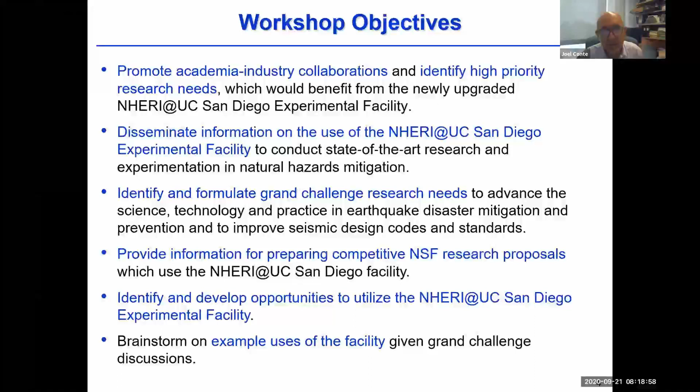So a few words about the agenda. After this introduction, I will present the capabilities of the NHERI at UC San Diego Experimental Facility. Then we will have two of my colleagues, Professor Jose Restrepo and Tara Hutchinson, talk about highlights of recent projects conducted on the LHPOST.

Then we will have a number of keynote presentations, five of them, four today and one tomorrow. We have Professor John van de Lindt who will talk about building structures, Dr. Sissy Nikolaou about geostructures, Dr. Anthony Sanchez about bridge structures, and Dr. Craig Davis about lifelines and utilities. I will provide a few concluding remarks.

On both days, we have reserved some time in the afternoon from 2 to 4. You can get more information about this on the agenda. We have reserved some time to answer questions and provide advising on future projects. We call this office hours.

Tomorrow we will start with a virtual walkthrough of the construction side of the LHPOST 6. We are going to call our facility LHPOST 6 once it is up and running with 6 degrees of freedom. Since we have the workshop virtually rather than in person, where we'd have a nice tour of the facility and you could see the real thing, we tried to create a virtual one.

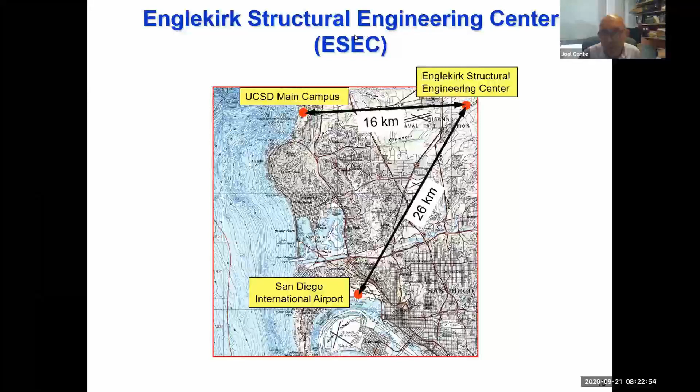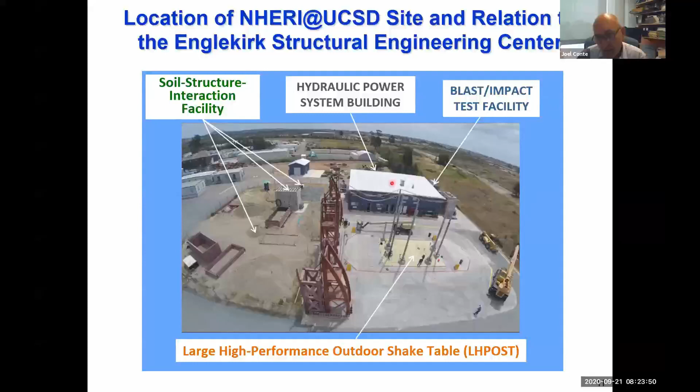We also have a soil foundation structure interaction facility there with 2 refillable large soil pits on each side of a large reaction wall. We have the hydraulic power system building that contains all the hydraulic power supply for the facility. We also have a unique blast impact facility that makes use of Servo-Hydraulic systems and uses the same hydraulic power supply as the shake table.

The site is accredited through the International Accreditation Service, which means that in over 80 countries in the world, the tests produced at this facility are accepted with no questions asked.

We were first part of the NEES network, funded by the National Science Foundation. NEES stands for Network for Earthquake Engineering Simulation, from 2004 to 2014, for 10 years. Then we became part of NHERI, which stands for Natural Hazard Engineering Research Infrastructure program, also funded by NSF. That ran initially from 2016 to 2020, but NSF is in the process of renewing NHERI up to 2025.

Here we have the UC San Diego team, with pictures of everyone. I'm the PI. There are 4 co-PIs: Tara Hutchinson, Gilberto Mosqueda, Benson Shing, and Lelli van den Einde, each responsible for different aspects of the site. Professor Jose Restrepo and Enrique Luco are senior personnel - they were the first and second PI of the site, and I'm the third one.

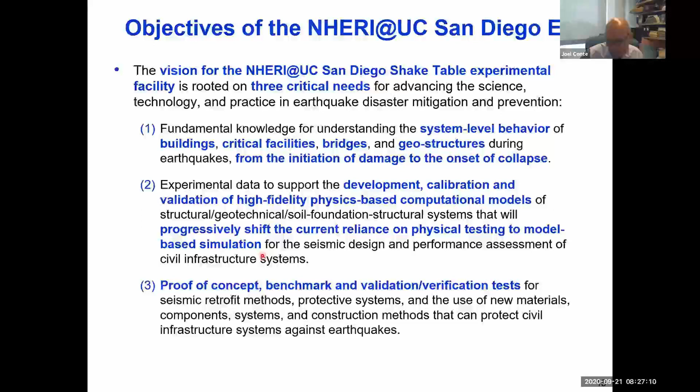When we designed the facility in 2001 to 2002, the key objective was to develop a shake table able to reproduce accurately large earthquake ground motions, especially those produced by near-source ground motions. Since we have a mild climate, we could build it outside. So we have no height limitation, which allows us to test specimens that could not have been tested in the largest shaking table in the world, at the E-Defense facility for example. Many of our specimens could not have been tested there.

So the facility was built in 2002 to 2004, commissioned on October 1st, 2004, as part of the NSF NEES network. Since then, we have conducted about 34 major research and a few commercial projects in 15 years of operations, since we closed on October 1st, 2019 for the upgrade.

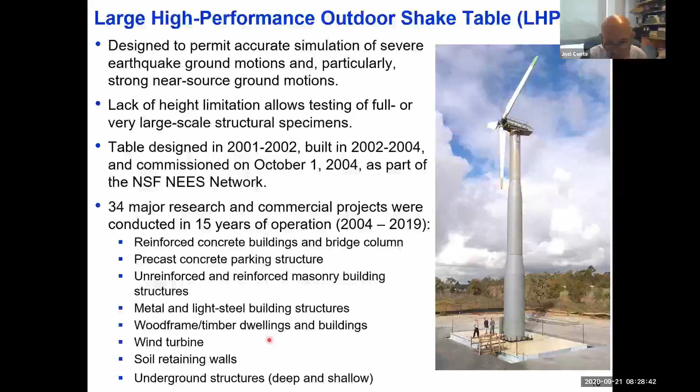Many of the specimens tested consist of buildings made out of reinforced concrete, precast concrete, reinforced and unreinforced masonry, metal, light steel, wood, timber, but we also have other types of structures like the wind turbine you see here, and geostructures such as soil retaining walls, underground structures, tunnels, and so on.

If we had soft soil, for example, at the site, it would have to be probably 15 to 20 times as big as what it is here. We took advantage of the soil stiffness and the radiation damping to have a light reaction mass, which helped us to lower the cost. This facility was designed as a 6 degree of freedom shake table system, but built only as a 1 degree of freedom to accommodate the budget at the time.

The salient characteristics of the table are the stroke, plus or minus 75 centimeters. A very important parameter, the peak velocity, 1.8 meters per second, which requires an incredible flow of oil to feed the actuators, as we will discuss more later.

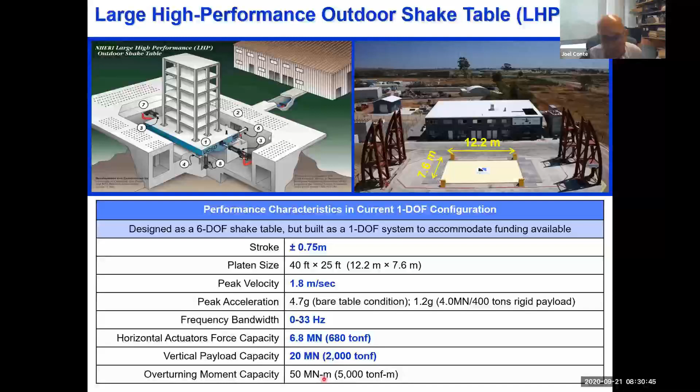You can see the peak acceleration for the bare table approaching 5G, 1.2G when we have a 400-ton rigid payload. The frequency bandwidth is 0 to 33 hertz. The maximum horizontal force, a number we will compare with the upgraded version, is 6.8 meganewton or 680 metric tons. And the vertical payload capacity, 20 meganewton, with a very large overturning moment capacity of 50 meganewton meters.

To summarize, our shake table provides the ability to simulate near source earthquake ground motion, which involves large acceleration, velocity, and displacement pulses, allowing testing of densely instrumented, large or full-scale structural specimens. Also, when we use the shake table in combination with our two large soil boxes that we'll talk about, we can also test geostructures at large scale.

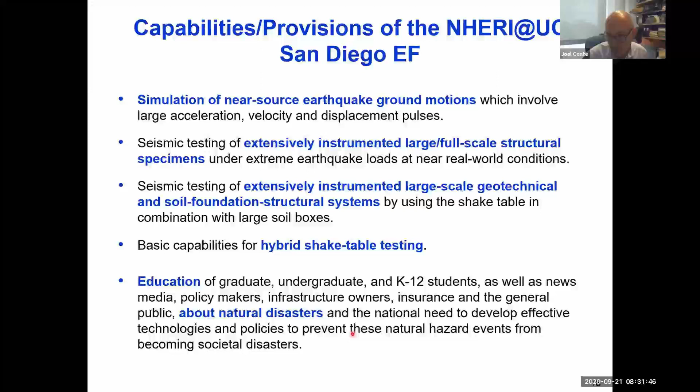We also have some basic capabilities for hybrid shake table testing. And in terms of education, this is an amazing tool from kindergarten to graduate school, and also for news media, policymakers, infrastructure owners, insurance, and the general public, about natural disasters and the need to develop technologies to prevent these disasters from becoming societal disasters.

So now let's go and look at the components of the shake table. First, the LHPOST, 1 degree of freedom, and then I'll explain to you the changes we are making on the table to convert it to 6 degree of freedom.

So here you have the reaction mass. Initially, we had 6 pressure balance bearings that in 2009 were already replaced by 6 vertical actuators, but ported with a very small servo valve, so they could not be used dynamically until we reopen next year.

You see here one of the longitudinal actuators. You see 2 hold-down struts. They are nitrogen-filled tubes that apply a downward force to pre-stress the platen against the vertical actuators, giving the overturning moment capacity.

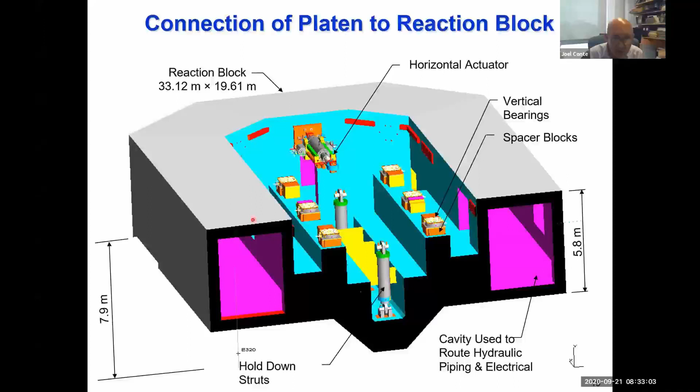Appreciate the size. You see the length of the reaction mass, 33 meters, width almost 20 meters, the largest depth 8 meters.

So here you see the platen, the longitudinal actuators, and the 2 hold-down struts. As part of the upgrade, we are going to need a 3rd hold-down strut. You see we already have the plates here, with the spacer blocks ready to receive it.

We see a view from underneath. So when we move the platen, it moves on top of the vertical actuators through these wear plates, represented in pink here. As part of the upgrade, we have to replace these wear plates with much larger ones, since now the table can also go in the transverse direction.

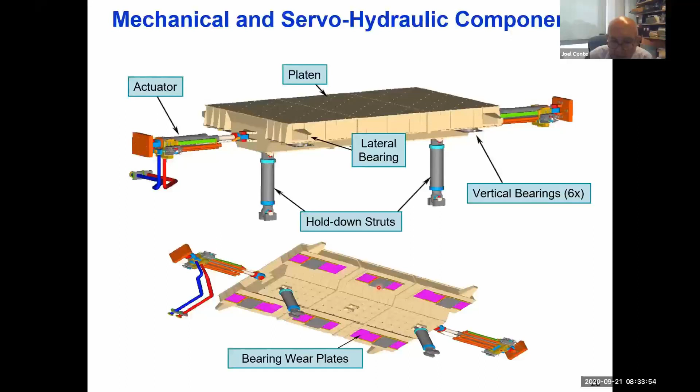And these gray plates that you can see here are the pressure balance bearings that are on top of the vertical actuators.

You see here a picture of the hold-down strut. They applied a very large downward force, you can see 200 metric tons. The weight of the platen for the 1 degree of freedom was 145 metric tons. So we have 2 gigantic forces of 200 metric tons each, one at each end of the platen, for the overturning moment capacity.

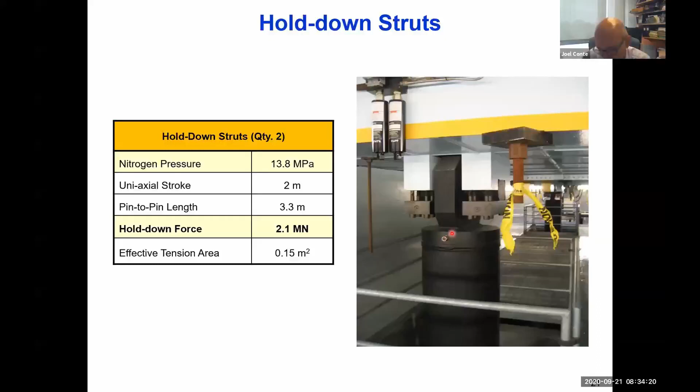You see here the horizontal actuators. We had 2 for the 1 degree of freedom. They can push more than they can pull, but since we have 2, if you add these numbers together, you have 6.9 meganewton of push and pull on the platen.

Each of these longitudinal actuators is equipped with 2 very large servo valves, with a very high flow of 2,500 gallons per minute each. That's what is needed to reproduce the peak ground motion velocity of 1.8 meters per second.

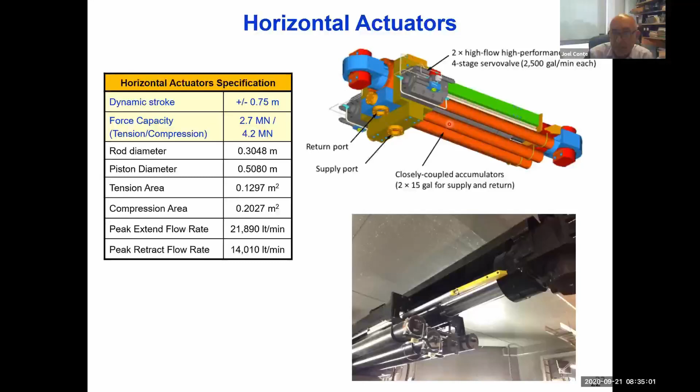So this is one of these servo valves, gigantic. It's a 4-stage servo valve. Those of you who are interested in servo-hydraulics can see here the 4 stages. The spool that we can see here inside the sleeve for the 4th stage is gigantic.

It weighs 320 kilograms, and you see that's where we receive the high pressure fluid at 3000 PSI. It arrives in this cavity here, and when the spool moves to the left or to the right, you can see these port windows. Then they would port the fluid either to the left or the right of the piston in the rod, and then the rod would either extend or retract and push and pull the table.

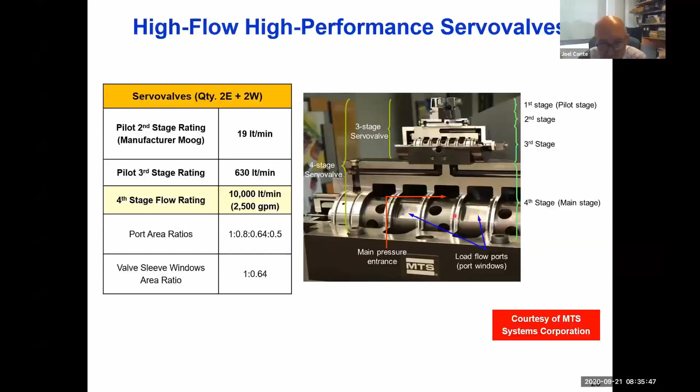So this is a picture of the vertical actuators that we already acquired in 2009. They have a capability of moving plus or minus 5 inches, but we never used this capability until now because they were ported with a servo valve of 15 GPM. So we had no dynamic capability, but now we are going to port them with a servo valve of 5,000 GPM. Huge servo valve.

You can see here the pressure balance bearings, that gray plate that is interfacing, connecting to the wear plate at the bottom of the Platen. And you see the oil coming in these channels here, radial and circular. There is a seal on the outer circle to contain the lubrication and the oil.

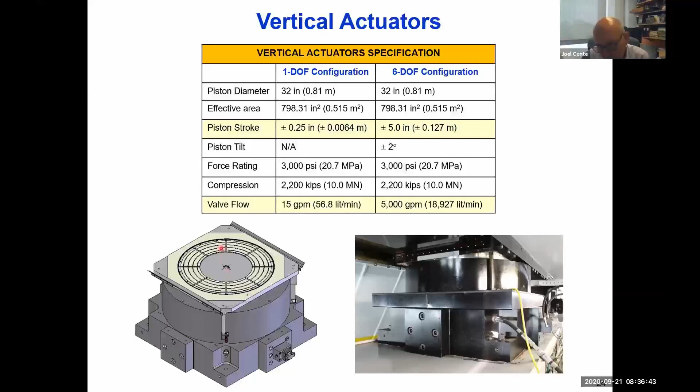Here, just to show you how the hydraulic power system works when we want to reproduce an earthquake. We cannot rely on direct pumping from pumps only, it would take many, many pumps. We have only 2 of them, 2 very large ones. You see the flow of the pumps here.

And then we have a hydraulic accumulator bank, 50 bottles of 50 gallons each, to 2,500 gallons total. They are filled with nitrogen. There is a piston at the bottom, and we can bring some oil at the bottom of each bottle. We can occupy up to 20–25% of oil. So we bring oil until the nitrogen pressure reaches 5,000 PSI. In idle situation, the nitrogen pressure is 3,000 PSI when the piston is at the bottom.

So we pressurize oil in the accumulator bank, and when we want to reproduce an earthquake, we release this oil, we blow it down through a blow down valve. We have 2 now, but in the new system we'll talk about, we're going to need 6 of them. The oil goes through large pipes to the actuators, and then returns to a surge tank, a very large surge tank, which was designed to be large enough for the upgrade to 6 degrees of freedom.

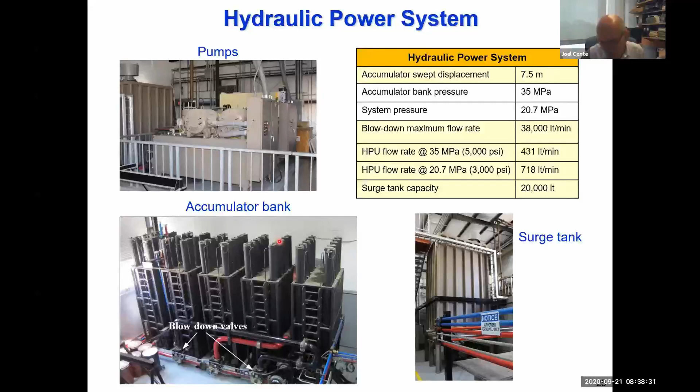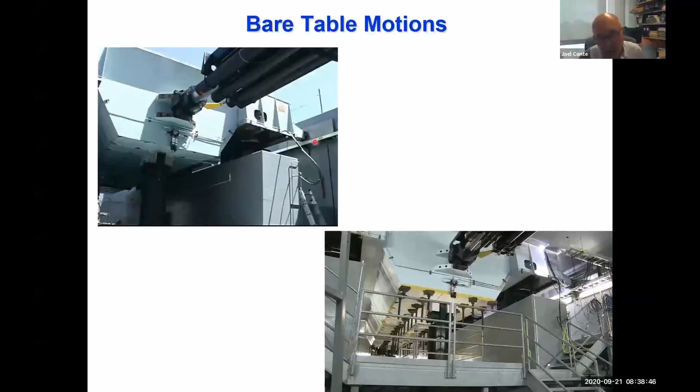So here, this was during commissioning a long time ago in 2004. You can see how it works. You could see a view from underneath here with the nitrogen-filled cylinders.

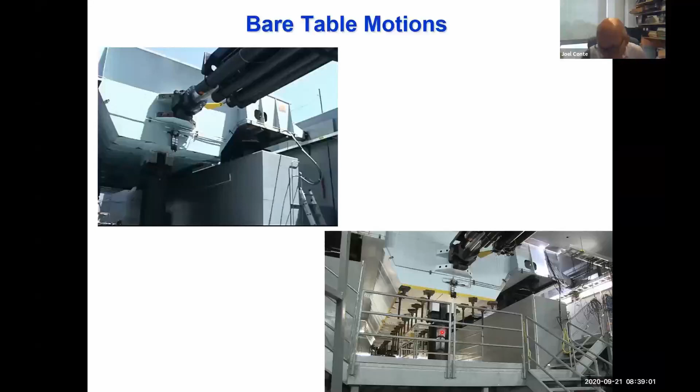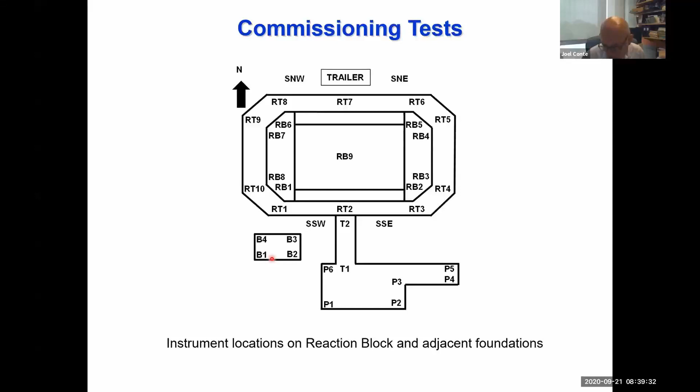You see here a few words about the reaction mass. This is just after its completion in 2003. We did some forced vibration testing by using large eccentric shakers. You see one of them there, because we wanted to understand the dynamic characteristic of the reaction mass embedded in the soil at the site. So we had instrumented the reaction block and the foundation of the building and the foundation of the blast facility.

This slide is important because it shows you the frequency response function of the reaction mass of the block. When both shakers at both ends were in phase and applying force in the east-west direction, shown by my cursor here, the horizontal displacement at the top of the reaction mass, the blue curve here, as a function of frequency, with the forcing function applied, scaled to the maximum force that the actuator can produce. Of course, the shakers could not produce this force.

Later on, when we had the actuators, we did a test of linearity, and everything behaves quasi-linearly. In other words, we could scale the frequency response function from our test with the shakers, scale them up, and get the same frequency response curves as we got when we were using directly the actuators acting on the reaction mass.

So you can see here that we have a characteristic frequency, a natural frequency so to speak, of the mass in the soil at about 10 to 11 hertz, but it's a broad peak. There is a very high radiation damping, about 30 to 40%. And look at the deformation, a quarter of a millimeter, very, very small.

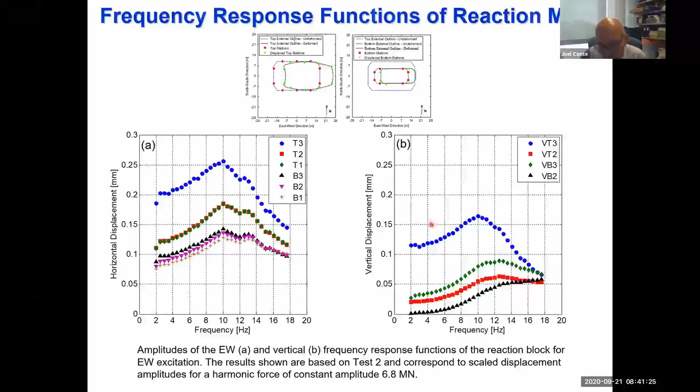This is the same thing, but for the vertical displacement at the end of the reaction mass, since we have rocking. When we excite this horizontally in the east-west direction, we have translation and rocking, so the vertical displacement is 0.15 millimeters. We also did some tests in the north-south direction, and this is published for those of you who are interested.

Let's say now a few words about the MTS Three-Variable Controller, the 469D, that was used on the LHPOST 1 degree of freedom and will also be used in the upgraded table. This controller is used in all large shake tables manufactured by MTS. I should have mentioned early on that the design of this facility is a joint effort between a team of professors here at UC San Diego and MTS Systems Corporation for the initial design and now also for the upgrade.

This controller is a linear state variable controller, the three-state variable controlled by this TVC, which stands for three variable controller: displacement, velocity, and acceleration. We can choose the mode, which basically tells you which signal you are going to provide to the controller as a user. Most of the time we provide an acceleration signal, the earthquake accelerogram that we want to reproduce.

This controller has special features to compensate for the various sources of signal distortion due to linear dynamics or nonlinear dynamics. The options are different if you want to reproduce harmonic motions or broadband signals like earthquake records. The ones we use the most when reproducing earthquake records are the adaptive inverse control, AIC, and the online iteration, OLI, which is an iterative signal matching technique.

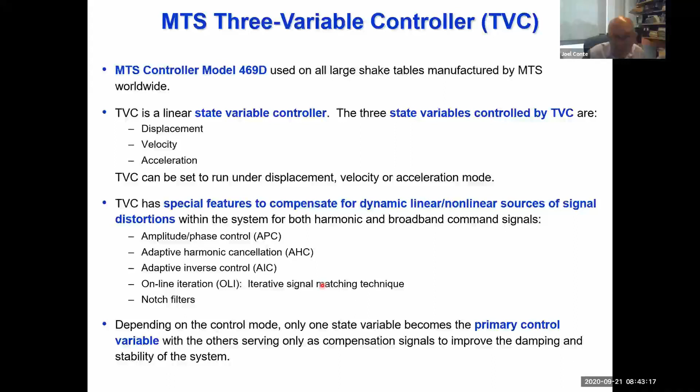So on this slide, there's a lot of technical information, but I think some of you are interested in this. You see a block diagram of the TVC part of the controller, the basic TVC for the 1 degree of freedom LHPOST. You see a reference generator where you bring your signal, typically acceleration, and then the reference generator will integrate to get velocity and displacement, and differentiate again to get the jerk, the third derivative of the displacement.

All these signals are used in a feed-forward way in the control loop. There is a feed-forward gain, a control feed-forward gain here. It gives a lot of flexibility to shape the transfer function of the shake table system.

In terms of feedback signals, we measure the acceleration feedback and the displacement feedback through the LVDT associated with the longitudinal actuators, and internally the controller computes the velocity. But all three signals are not just measured - they are measured and then recomputed, considering that at low frequency the LVDT produces the most accurate signal for displacement, and at high frequency the accelerometers provide the most accurate measurement.

So they are hybrid signals that are reconstructed to get the best possible estimate of the true displacement, velocity, and acceleration. There is also the force feedback, the delta pressure feedback coming from both actuators. So the control loop is closed on the displacement - you see there is the target displacement here, and there is the feedback displacement.

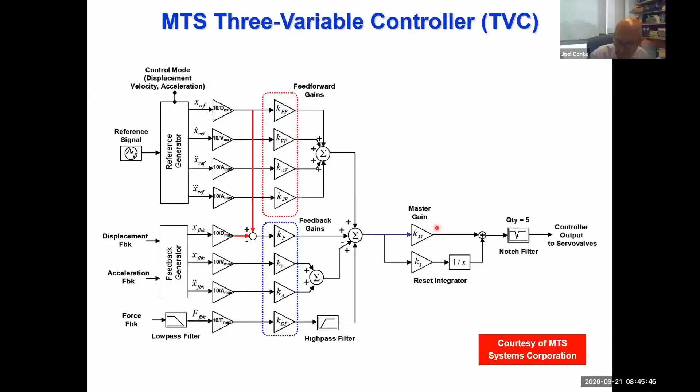So when we tune the controller for a shake table test, if you come and do some testing here, we will ask you to give us your earthquake records. For each of them, the shake table operator will spend some time tuning the table so that the ground motion record you give us will be best reproduced on the shake table system. So the tuning process consists of 3 steps.

The first step: the shake table operator iteratively keeps changing the control parameters, the feed forward gain and the feedback gain, until the shake table is able to reproduce a random type motion that we call white noise, at an amplitude of root mean square about 7% G.

So the shake table operator sees the signal on the screen, the time history, and keeps changing the gain until these time histories are reproduced pretty accurately, or until the transfer function you see here is as close to 1 as possible. Of course it can never be equal to 1 because it's a very complex dynamic system. You can see here an example - the black would be the transfer function at a certain stage of tuning.

Then in the second step, the inverse transfer function of the shake table system is estimated as accurately as possible using the AIC technique, adaptive inverse control.

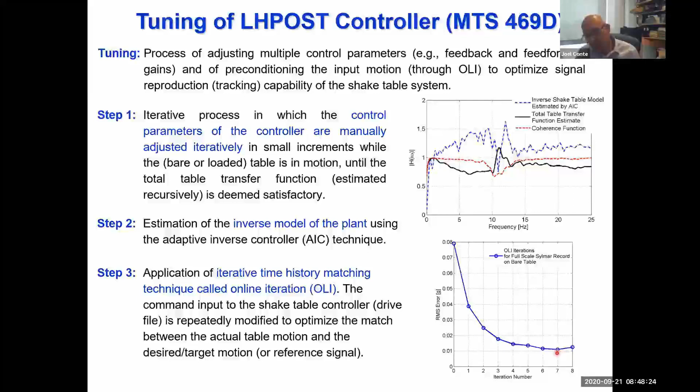That error goes down iteration by iteration until you reach a point where it cannot go down further and it starts to increase again. At this point we would save the drive file, and on the day of the test we use that drive file to reproduce the earthquake motion on the platen.

This is to show you the accuracy of the LHPOST 1 degree of freedom. You can see here we were trying to reproduce an earthquake record from the 1994 Northridge earthquake - the acceleration time history, the target in red and the one achieved by the table in blue. You see the zoom here - very accurate.

You see here also the achieved and target spectral displacement and pseudo acceleration spectrum. We are very proud of this - it's very, very difficult for such a large shake table facility to have such accuracy.

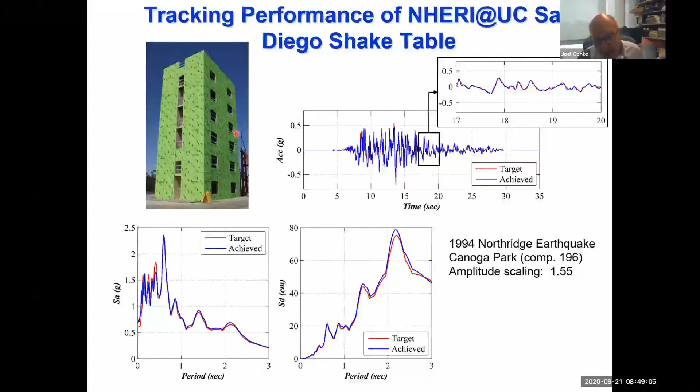In terms of instrumentation, whenever we test a specimen we have a large number of channels. We have 12 nodes at 64 channels each, 768 channels total. Some of them have to be used for the machine itself to understand the response of the platen and so on, but still overall a very large number of channels.

We will have a brand new data acquisition system. In the past we had 16-bit, but we were just awarded an MRI proposal from the National Science Foundation to update the data acquisition system. We will have 24-bit analog to digital resolution, perfectly simultaneous sampling and not multiplexing, and over 25,000 samples per second per channel available.

Typically we sample at 200 or 250 samples per second. We have an inventory of instruments: accelerometers, displacement transducers, string potentiometers, load jacks, load cells, soil pressure transducers. We have a GPS system that allows us to get displacement time history in 3 directions at 50 Hertz with an accuracy of 1.5 millimeter.

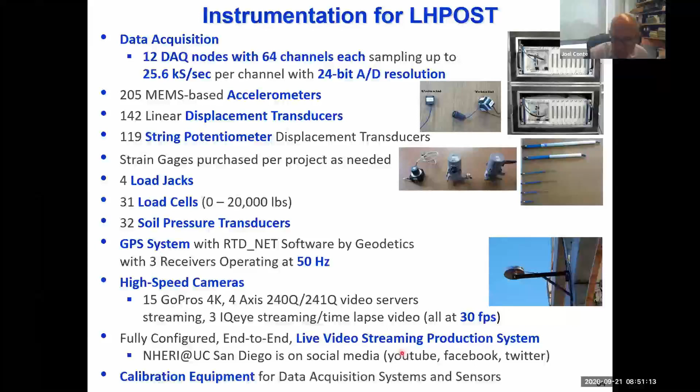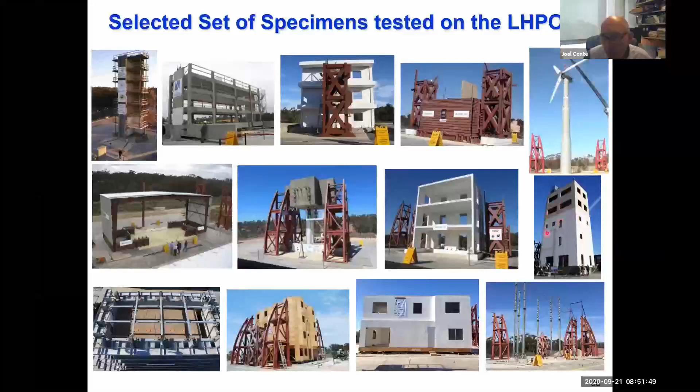You can see a precast concrete building here, a metal building, a 7-story slice of a building, a bridge pier full scale, a retaining wall, a 5-story building with all non-structural component and system, and so on. Now I'm going to show you a few short movies about some of these tests.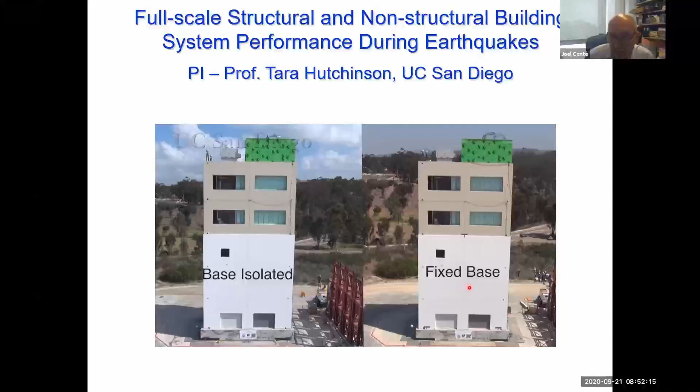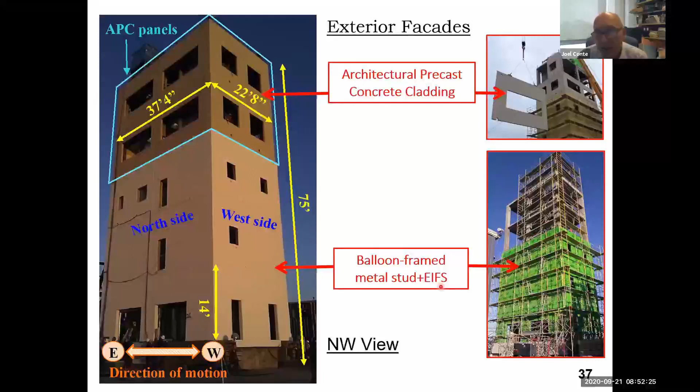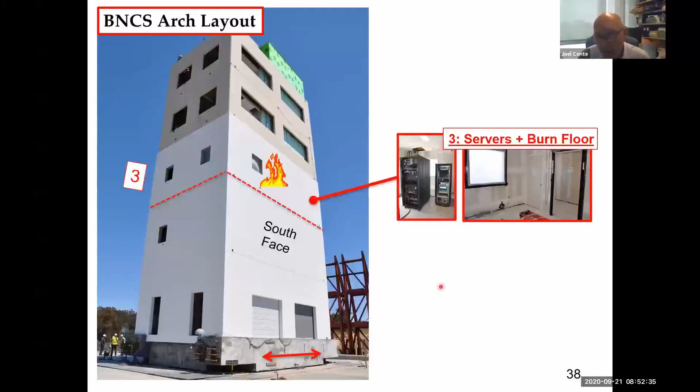This was a full-scale 5-story reinforced concrete building with non-structural components and systems, first tested on base isolators, one at each corner, and then fixed to the platen to simulate fixed base condition. This building had two different types of facade - light facade on the bottom and heavy precast concrete cladding on top. Every floor had a different utilization to simulate a real building - we even had an intensive care unit on the 4th story and a surgery suite at the top.

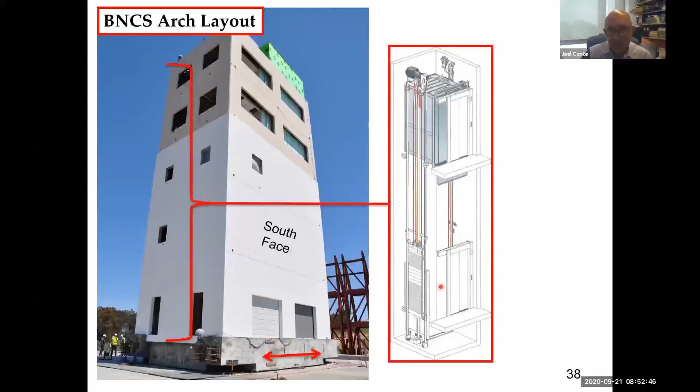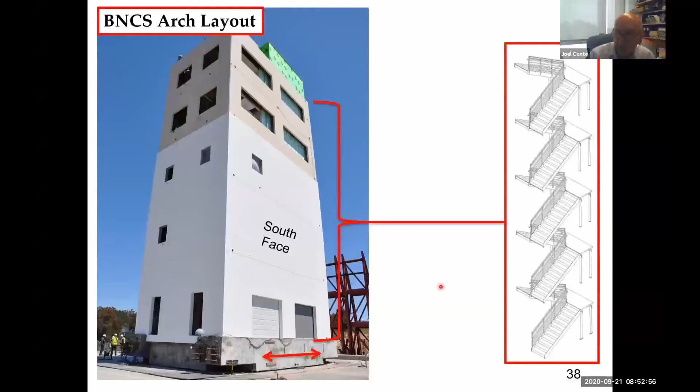And we had a fully working elevator and stairs. So non-structural components would be very difficult to make available at reduced scale, right? So the need for full scale here was important.

Now a short movie: every time there's an experiment, the research team has already created a model of the experiment before the test, with their best prediction ready to be compared with the experimental results. Here we compare in red the experimental result, in blue the prediction. You see the finite element model on seismic isolators, with the acceleration on the table, the shear strain in the isolators, the displacement at the 3rd and 6th story, the interstory drift ratio, the floor acceleration, floor shear, and floor overturning moment.

I'm going to play this here. During this test, the shear strain in the seismic isolators reached 150%. You can see that the blue and the red are pretty much on top of each other. It's easy to predict because the response of the building, except for the base isolators, is linear. You can see here the total base shear versus the shear strain in the isolators.

Now let me go back and play this again, because we were playing the same earthquake from Peru, 2007, the Ica earthquake, at scale 140% for the base isolated building and 100% for the fixed base. So it was higher for the base isolated.

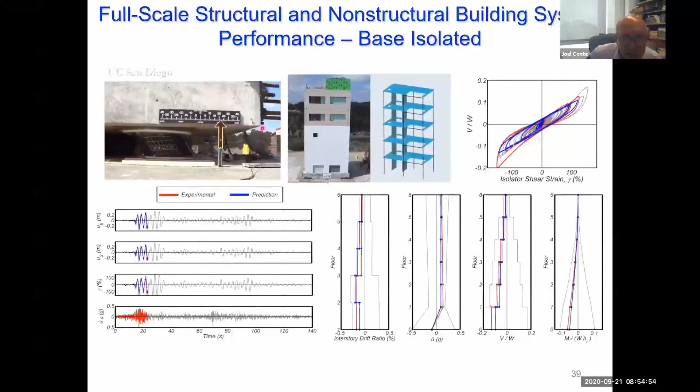If you followed the movie, let me go back and play it again. You'll see that the beds in the hospital room at the top, for the fixed base, were very disrupted - they topple over - while here, in the base isolated system, they are just slowly rolling.

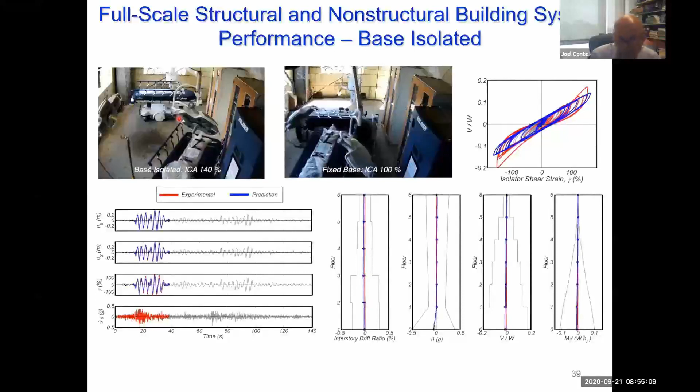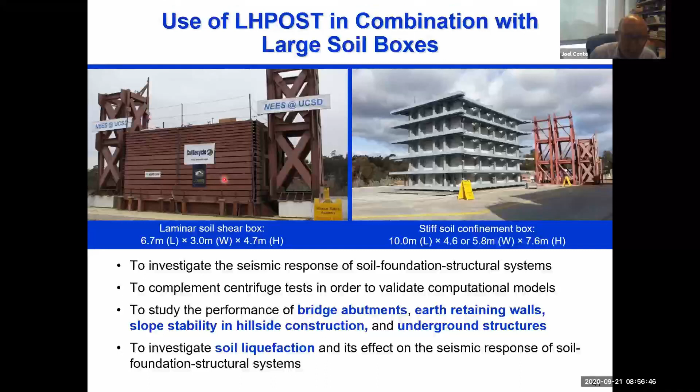It's a very complementary tool to the centrifuge machine, for example at UC Davis, to validate computational models. We can also study soil liquefaction by putting a liner inside the box to contain the fluid and saturate the soil inside. Here I'm going to show you a short movie from one of the tests performed by Professor Elgamal. You see the construction of the laminar box here.

It takes about a week to set it up. You see the installation of a single pile in the box and the filling of the box with multiple layers of soil. Here you see a snapshot of the box during a test - notice there is a ramp. I'm not an expert in geotechnical earthquake engineering, but I know soil liquefaction is accentuated if there is a slope in the terrain, and the soil spreading due to liquefaction will be accentuated.

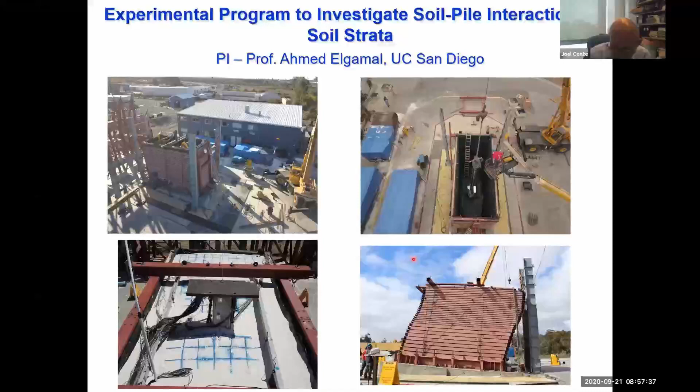So here you're going to see two movies in parallel. Look at the response of the shear box - you'll see a little leak of water at some point, and you'll see that there's a layer about here that is much more vulnerable to liquefaction than the rest, so you'll have a shear strain much larger. You already see it here because that picture is from the middle of the test, so the layer has very large strain due to soil liquefaction. Then you'll see the lateral soil spreading, gradual migration of the soil to the right, and of the pile as well.

See the water leak here.

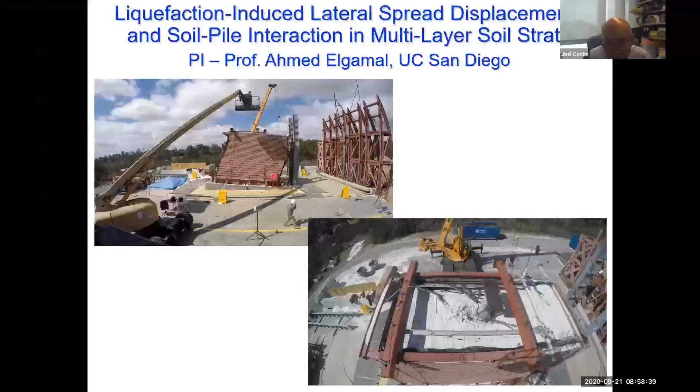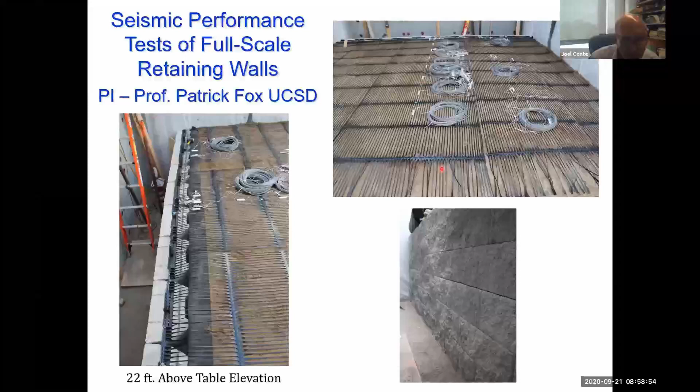Okay, here we see a retaining wall with the reinforced earth. Professor Patrick Fox, when he was here, there was a lot of instrumentation, accelerometers in the soil, strain gauges in the synthetic material. So you see a test here.

You see string potentiometers to measure the displacement. You see the result of the string potentiometers here, the accelerometers here. And here you see in white, the acceleration of the table, and in red, the accelerometer at the crest of the wall. So a very large amplification.

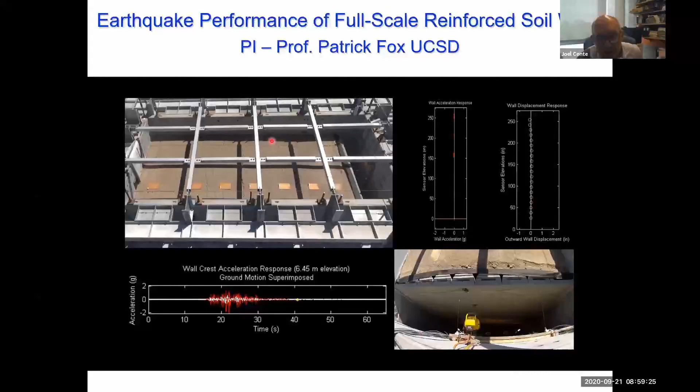And you see some significant crack in the soil here. And one more test about soil foundation structure interaction.

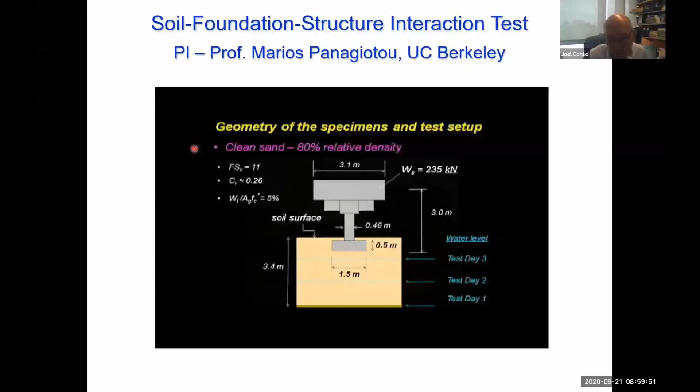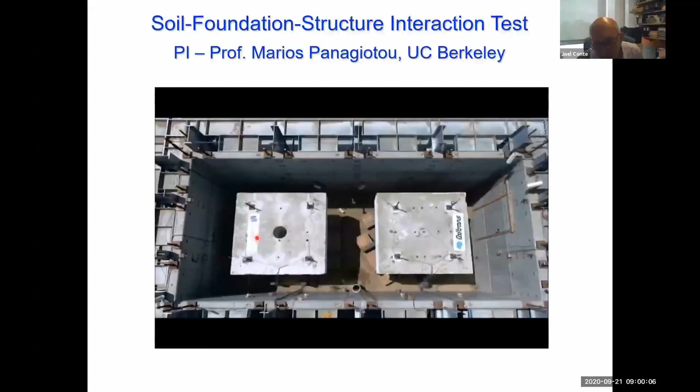The California Department of Transportation is very interested in designing bridges with columns on foundations that rock on the soil, so to speak, to push the nonlinearity at the interface of the foundation and the soil and out of the structure. So here we're going to see two specimens, one that was rotated 45 degrees, two columns with a very large tributary mass at the top, inside the large box that we have.

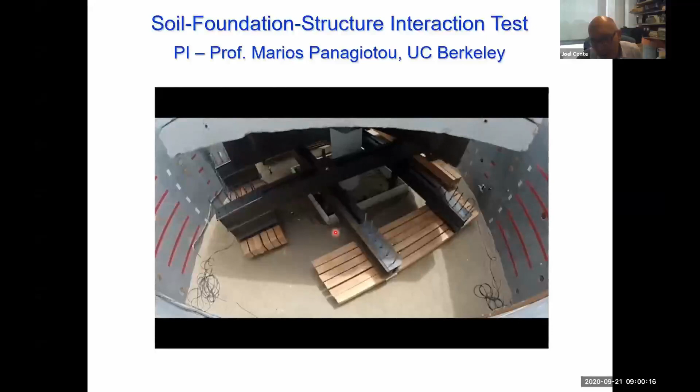All this outrigger is to prevent the column from tilting and damaging the box, right? So it's not part of the specimen, but you can see here.

See, with our camera, we can have amazing shots that speak more than many, many sensors.

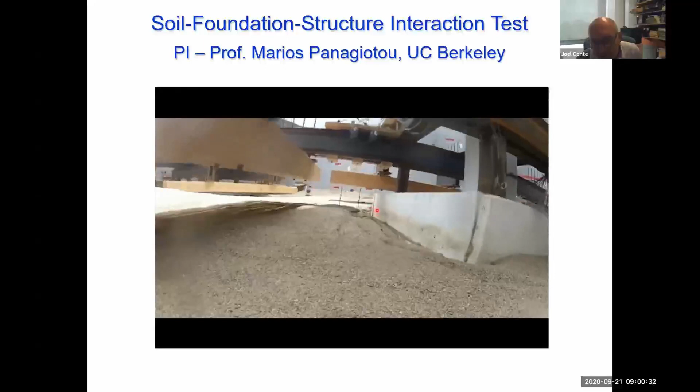We also have a staging facility that is even larger than the footprint of the Platen. The Platen is 40 feet by 25 feet here, 44 feet by 30 feet, 3 feet deep. So this is for building maybe specimens up to 100 ton, and then they could, with a crane, be moved to the Platen to increase the workflow at the facility, the throughput of the facility, or to build big components of a very large specimen and then bring the component on the Platen.

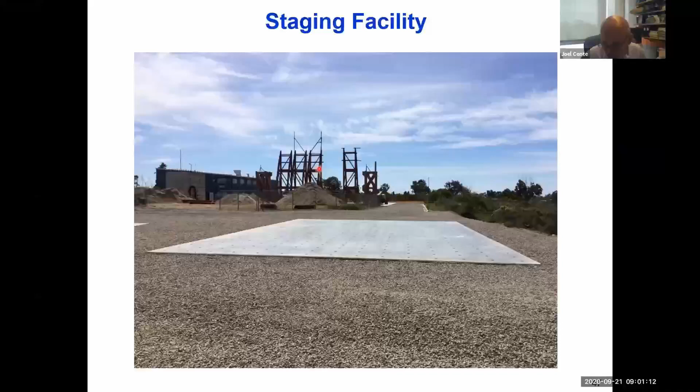A few words about hybrid shake table testing. We have some basic capabilities in terms of hardware and software. You can see them here. And I'm showing two cartoons, so to speak, here.

One where you would have a tall building and the top few stories would be used as a tuned mass damper and connected to the remainder of the building through some devices, passive, semi-active, or active. And then, for example, in a case like this, we could test these top few stories on the shake table Platen with the devices. And then the bottom part of the building would be modeled in the computer.

And using hybrid testing, at every time step, we would measure the force feedback from this part onto the Platen and bring this information into the equation of motion in the computer, and combine it with the equation of motion of the bottom part, and then predict the response of the complete system at the next time step.

And then we would have, at the next time step, the displacement. Here, we would command this displacement on the shake table. So at the difference of using a shake table when you give the complete signal at the beginning of a test, here you would send to the shake table controller one value at a time, so in real time.

And here we would, for example, be interested in a building with a stiff mat foundation on a group of piles. So the pile and the surrounding soil would be modeled, for example, in the computer, and the building on the shake table. And at every time step, we would command the total foundation motion to the shake table.

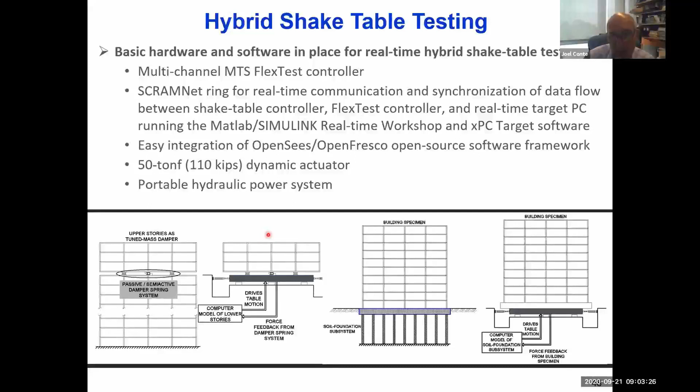So now let's talk about the upgrade to 6 degrees of freedom. So here, what we have seen so far, right? We have the 1 degree of freedom table here. From 2004 to 2009, we had just pressure balance bearings, that's it. In 2009, we brought 6 vertical actuators, but non-ported, so they could not be used dynamically.

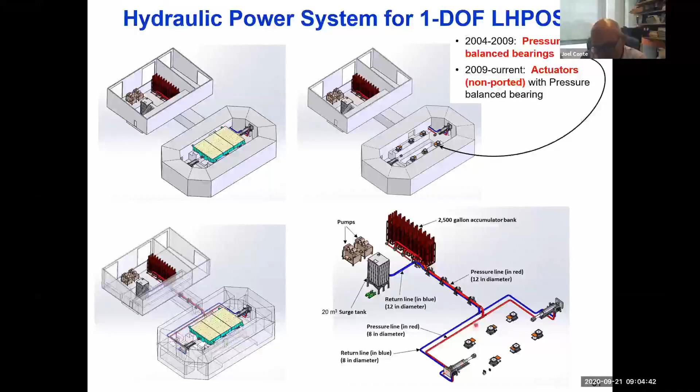And then you can see here, all of this is the picture of the 1 degree of freedom hydraulic power supply. You have seen the accumulator bank, the 2 pumps. We have 1 pressure line, 12-inch diameter steel pipe. And then when you are in the reaction mass, it becomes 8-inch diameter pipe, one going to the west actuator, one to the east. And then the blue pipe is the return flow.

So the idea we already had in 2004, 2002, and that slide comes from 2002. You see, it was before we trimmed the corners here of the reaction mass to lower the cost.

So this was the idea, to have a V-shaped horizontal actuator and add one hold-down strut in the middle, and double. At the time, we thought doubling up the accumulator bank would do it. When we started to do accurate calculation, we realized we need to multiply the accumulator bank by 4.

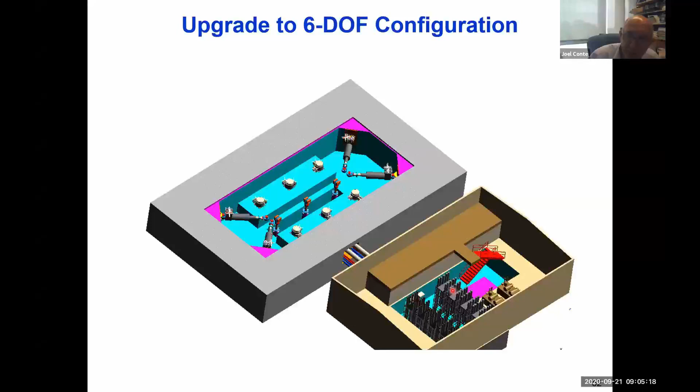So this is now the new hydraulic power system. Again, like I said, remove the existing accumulator bank and have one that is not 2,500 gallon, but 10,000 gallon. Very different type of accumulator bank.

Tomorrow you will see it in the virtual tour. It's very impressive, incredibly tall bottles.

And we had to acquire 2 more pumps to pressurize the accumulator bank. So we have 3 pumps that pressurize the accumulator bank at 5,000 PSI, and 1 pump that is used as a pilot flow, to provide the pilot flow.

Okay, just checking here the time. Yeah, all right. So you can see here a few things.

We have to double up the number of pressure lines. We need 2 now, 12-inch. When we are in the pit, we have a complete ring. We have to feed every one of the 6 vertical actuators. So we have a pressure main ring and then a pressure main return.

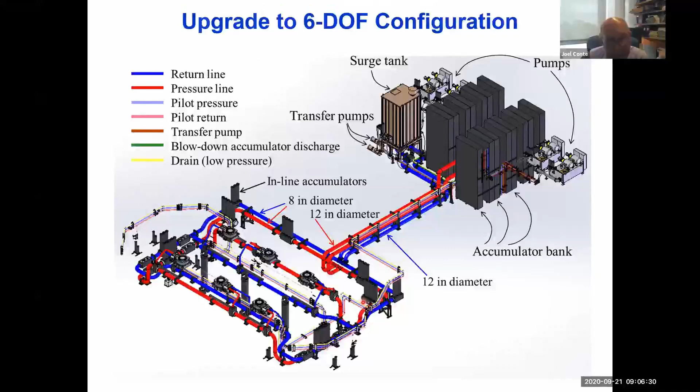You see here a few nice renderings showing the pressure line and how with this manifold it feeds every vertical actuator now, and then you have the return line in blue. You see the V-shape actuators.

You see the vertical actuators ported now, each of them with a very large servo valve. You see one here. You see the base plate for the horizontal actuator. We are in the process, as we speak, to install those, post-tension them to the reaction mass. And we have also these plates here that are impact plates for the crash protection system that I will say a few words about.

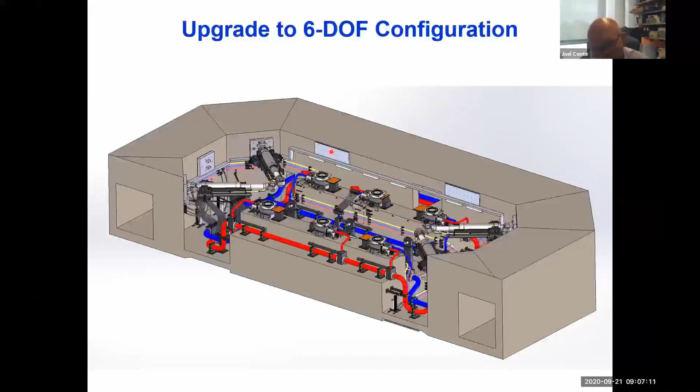So you see here the vertical actuator and the new servo valve, 5,000 GPM. Very, very high flow because of the large cross-section area of the vertical actuator.

You see here that we need to bring that 3rd hold-down strut here in the middle. Everything was ready for it. We just needed to order from the same supplier, the same one as the other 2.

You have a lot of inline accumulators here. You see here as well.

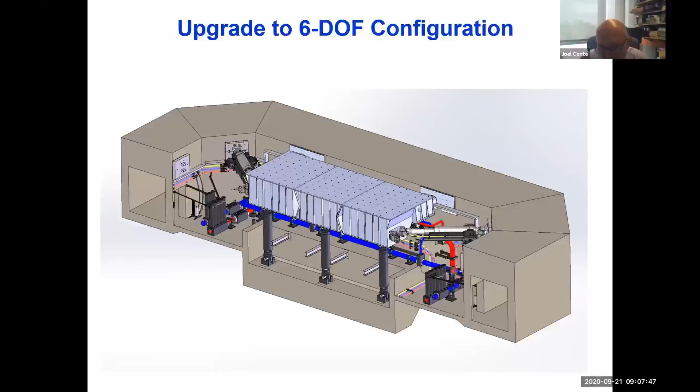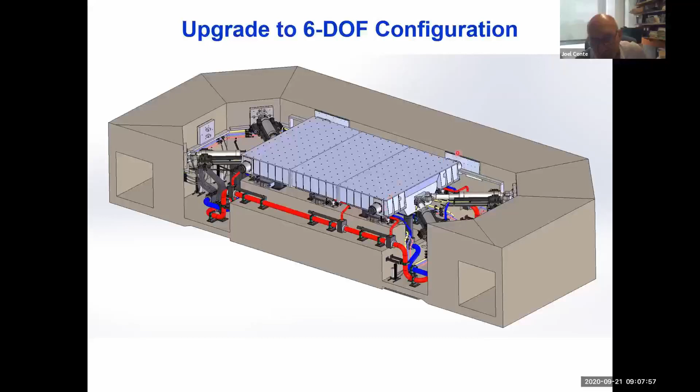And here you see that we will have bumpers. You see these bumpers, one at each corner, call it crash protection system.

The first one is to program the limit in the controller. And if this does not work, we also have physical limit switches that communicate with the controller of the shake table for aborting the test in case these limits are detected. And then if these 2 do not work, then we need to absorb the crash without damaging the reaction mass.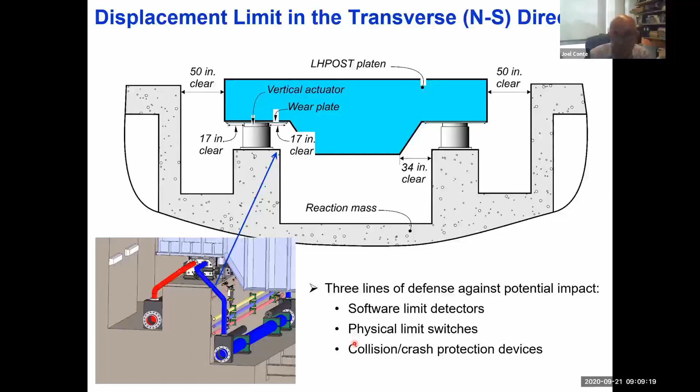And this was designed, you know, these bumpers here, each of them has 42 rods. Here, when you have an impact, you push on the middle part here, it puts the rods in tension, it yields them.

The design criteria was to stop a specimen of 1,000 tons moving and impacting the reaction mass at 1 meter per second, with 2-inch displacement. Since we had 17 inches, we want to allow only 15 inches of displacement for testing, because from 15 to 17 is to absorb the impact if we have to.

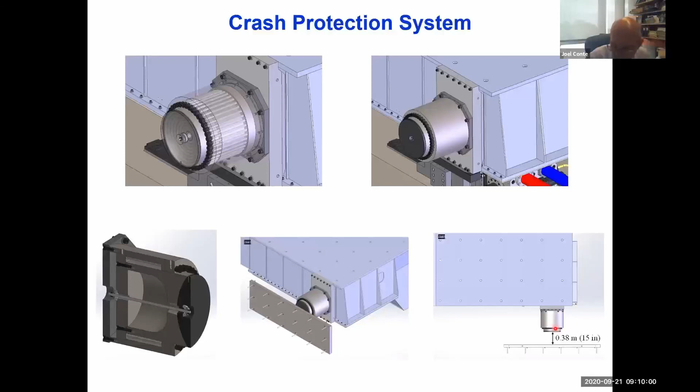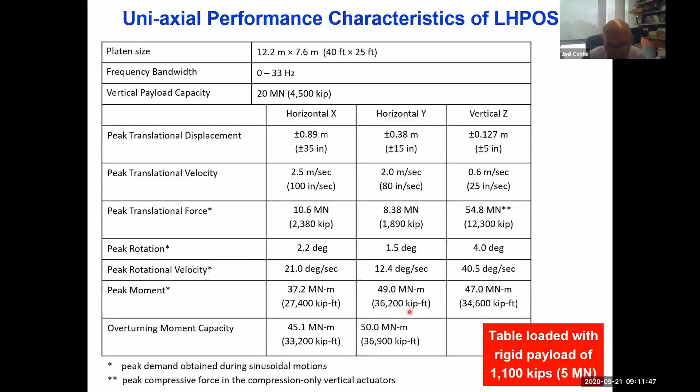We are also in the process of the upgrade. We used a model of shake table from MTS that they can customize to every shake table. So we worked with them to customize it to our upgrade, calibrate the parameters, and put in the best possible parameters. We tried here to show you how well the upgraded shake table will be able to reproduce earthquake ground motion in advance.

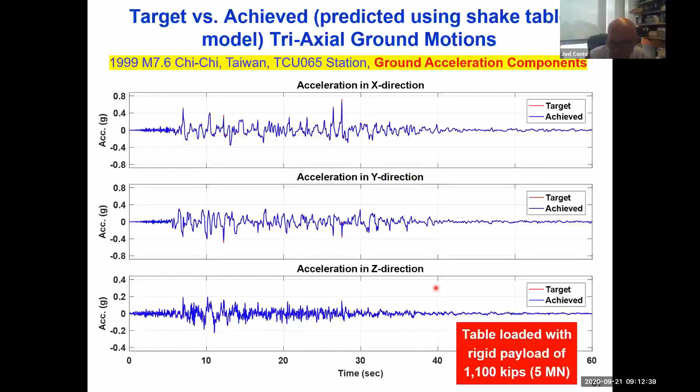This is the Chi-Chi Taiwan earthquake. You can see the target in red, the real earthquake record, and the one that we predict will be reproduced by the 6-degree-of-freedom LHPOST. It's very promising; you can see it remains an accurate table. Of course, we will have to wait until the commissioning test to see, since there is uncertainty about the prediction of the model.

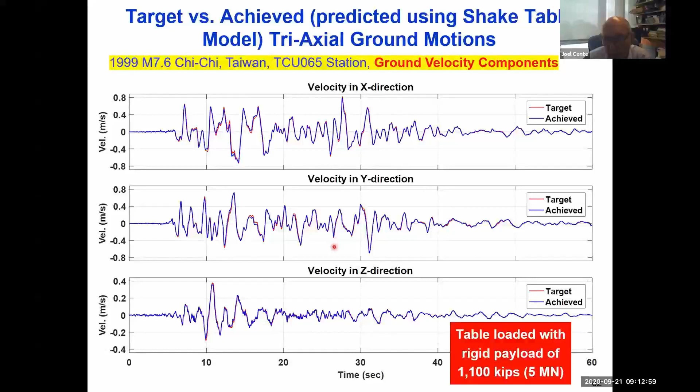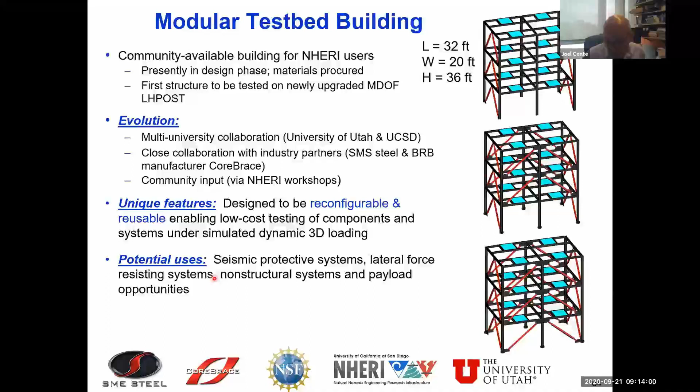I want to talk also about the modular test bed building, since I still have time. We have a large-scale test bed building that will be available as shared-use equipment. It will enable low-cost testing of components and systems, since researchers will not have to reserve funds to build the building. It's a reconfigurable building, full scale, 32 feet long, 20 feet wide, and 36 feet high. It will allow testing of, for example, seismic protective systems, lateral force resisting systems, non-structural components, and so on.

It has very interesting features. Every floor can be built as a moment frame or as a brace frame, with a number of replaceable devices where the nonlinearity will be concentrated, like buckling restrained braces, special moment frame joints, or shear fuses, for repeatable nonlinear behavior. This was designed by our two colleagues, Professor Gilberto Mosqueda, Tara Hutchinson, and Professor Chris Pantelides from the University of Utah. It will become available by the time we reopen for 6 degrees of freedom.

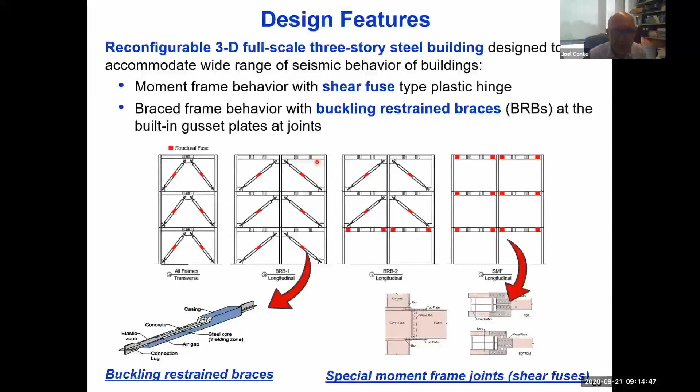Now, new research opportunities made possible by the LHPOST 6. I have just 4 slides now to conclude this presentation. I try to summarize here a number of topics, and maybe this would be also a good starting point for the breakout session tomorrow.

We will be able to study the response behavior of large-scale specimens in 3D, at large or full scale, under the combined effect of not only the 3 translational ground motions but also the rotational ground motion, which traditionally has always been neglected for two reasons: because it has not been measured in the past during real earthquakes—though now they are starting to measure them, and rotational ground motion seismology is a very fast-evolving field right now—and because the seismological community assumed they are negligible.

There are a number of papers in the literature showing that certain structures, tall buildings and tall bridge towers, could be very sensitive to rotational ground motion components, like the cartoon here shown by Professor Trifunac from USC in a 2009 paper. If you shake this building in the horizontal direction, you get drift just from horizontal excitation. Now if you rotate the base, as in the case of a passing Rayleigh wave, rotating the base back and forth also causes drift, and these two drifts can add up.

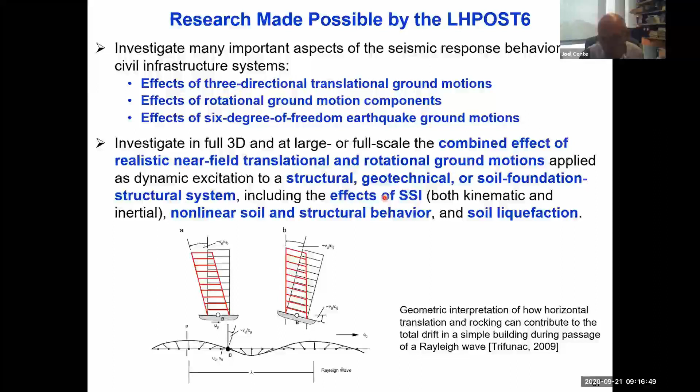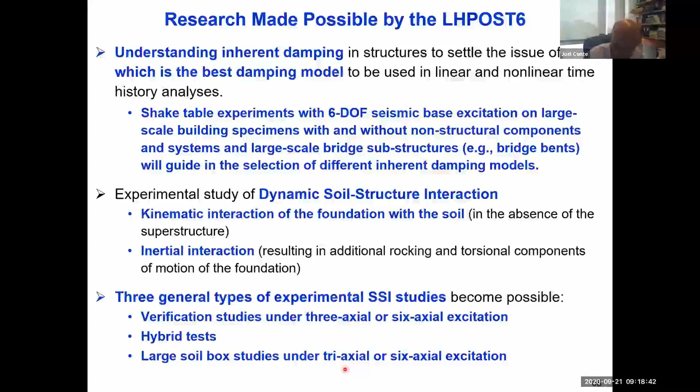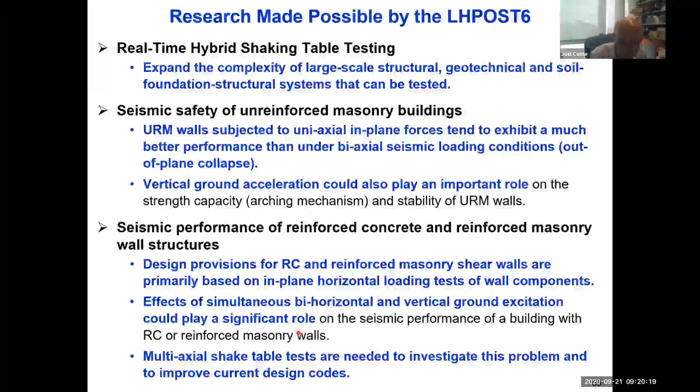For reinforced concrete and reinforced masonry structures, many design provisions are based primarily on in-plane horizontal loading tests of these components. Again, when you have bi-horizontal and vertical excitation, it could change the results quite a bit. So multi-axial shake table tests are needed to investigate this problem and further improve current design codes.

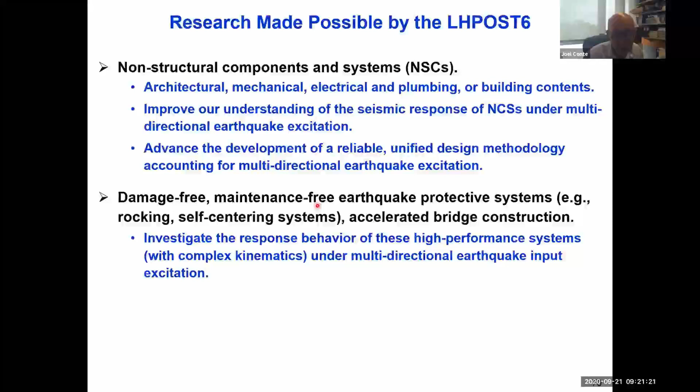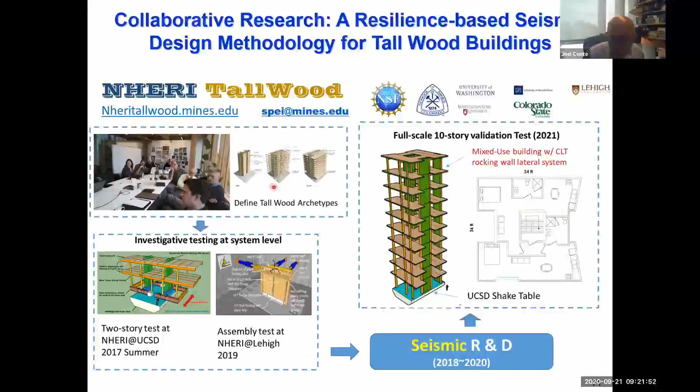Just to show you, after we reopen, we will first test the reconfigurable test frame building that I talked about for two weeks, as a guinea pig for the new system. And then we will have a full-scale 10-story timber structure made of cross-laminated timber and rocking walls. I think Professor van de Lindt will probably talk more about it. This will be a very exciting test to start with. You see a rendering of this test here.